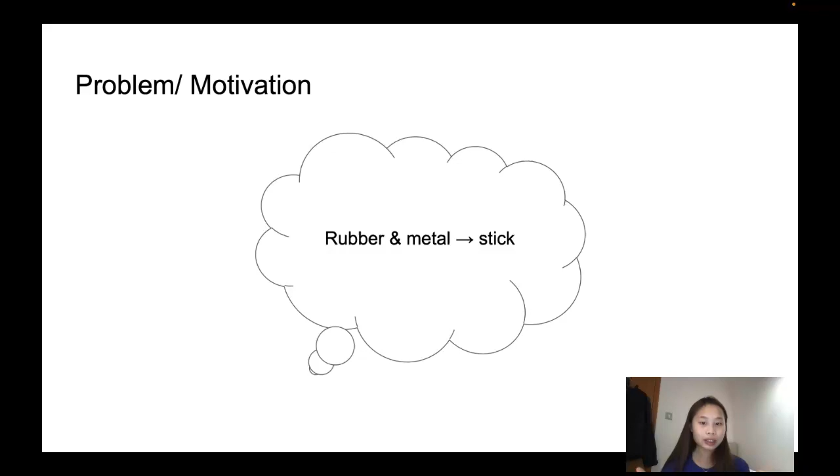And the invention was more of an accidental one because it wasn't initially targeted towards solving a specific problem, but it was invented while Semon was trying to figure out how to make rubber stick to metal. And his approach to this initial goal was trying to heat PVC up and remove the chlorine, but

the PVC just ended up being soft and flexible, and it can be molded into different shapes. So then that was how Semon figured out there's more to investigate. And that's how he invented what we now call plasticized PVC. And the initial process, as we described, was to heat it up and then cool it down, and then the PVC becomes this flexible material.

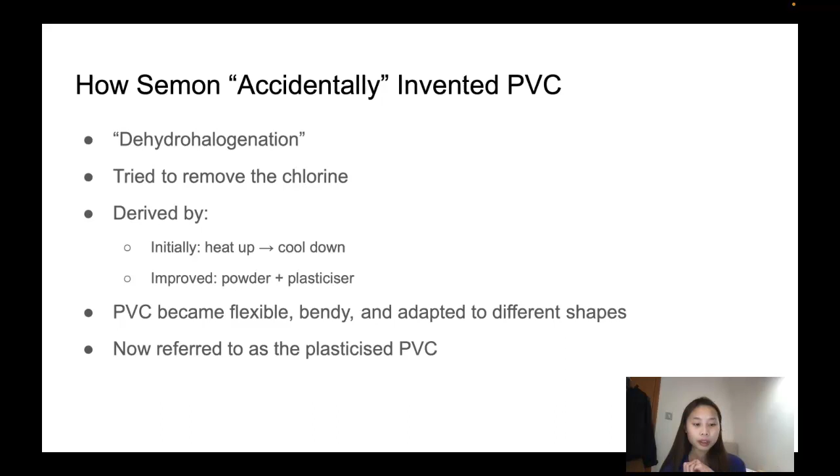But later on, Semon discovered that having the PVC in powder form first and adding something called plasticizer would also yield the same outcome. So that is the improved process that he opted for later on because it's way more efficient. And the challenge that he faced wasn't as much on the technical side, but more to get people to be accepting of the idea, because PVC at the time was a material that people saw as really useless because they couldn't figure out what to use it for.

So then, because people are so used to this idea that there's not much purpose, there's not much that PVC can be used for, it was really hard convincing people of the idea that actually PVC can be so useful.

And that was the same with the investor. When Semon first approached the investor, he was indifferent about it until Semon figured out that putting PVC on fabric would make it waterproof. So then that appealed to the investor, and that was how all of this started and how PVC got on the market and became so popular.

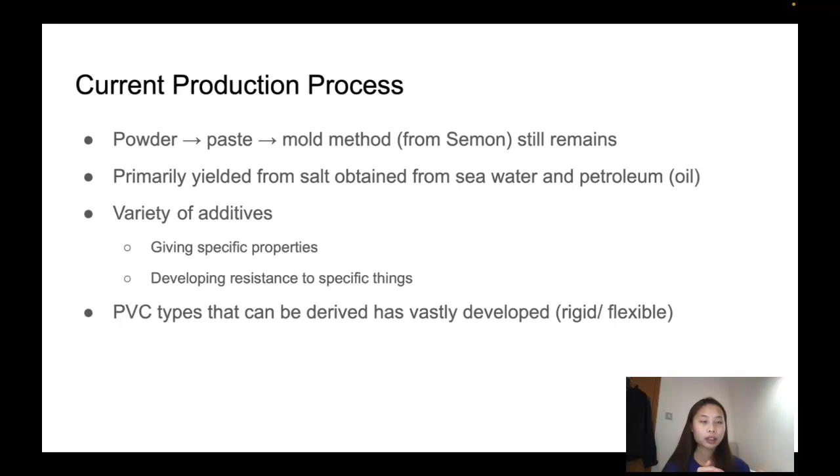So the current production process still uses the same powder method that Semon derived, but more specifically, it is from seawater, salt, and oil. They get combined into a powder and then heated up into a paste and then cool down and get molded into different shapes. And during this process, a lot of different additives are added to give the PVC specific properties.

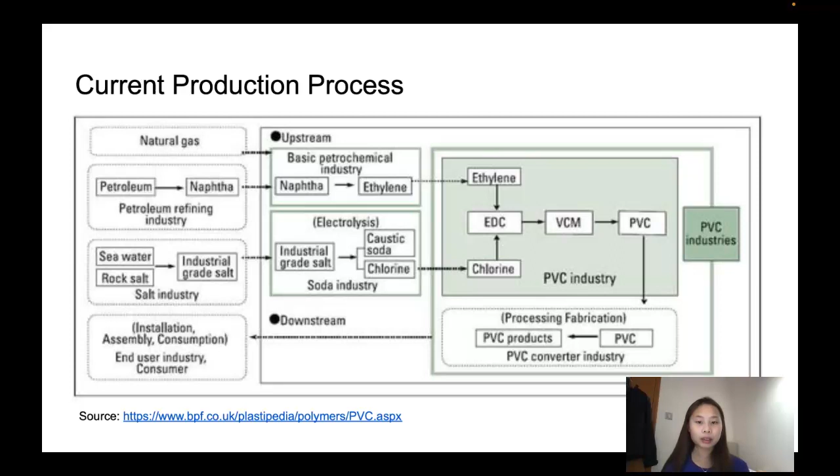And this is a really detailed diagram of how the production process works, but in reference to that, I created a more simplified one that is basically the same but highlights the key steps. So as we can see, from salt and oil, chlorine and ethylene are derived, and they combine, forming vinyl chloride monomer. So basically a monomer is the building block of a polymer.

And so PVC is a polymer, and a polymer is basically built out of many monomers. So there's the vinyl chloride monomer, and then it goes through a process called polymerization, which is basically the monomers coming together, forming this polymer, which is the polyvinyl chloride resin. That is the powder we've been talking about.

And then from there, the powder gets heated up, and while it's heated up, it turns into a thick paste, and then the additives get added to it. And this process is called gelation. So then after gelation, it gets cooled down and molded into different shapes, and then we get the desired PVC compound.

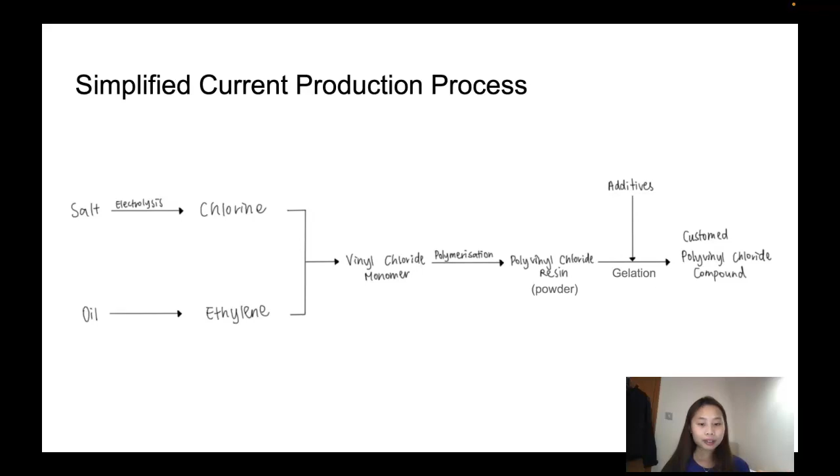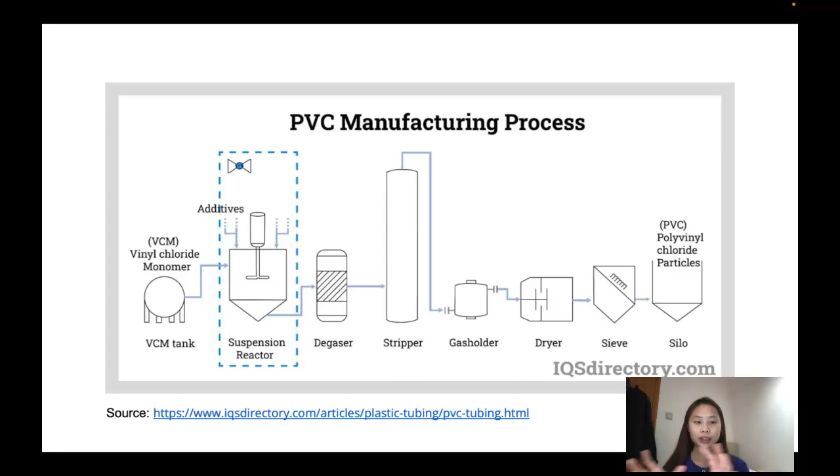And this is an even more detailed process flow diagram of how the monomer goes through all these steps to become the PVC, but this is just for reference. And this is the structure: on the left, it's the structure of the monomer. And then you can see after the polymerization, it's just a lot of these monomers together. And on the right, you can see the structure of the polymer.

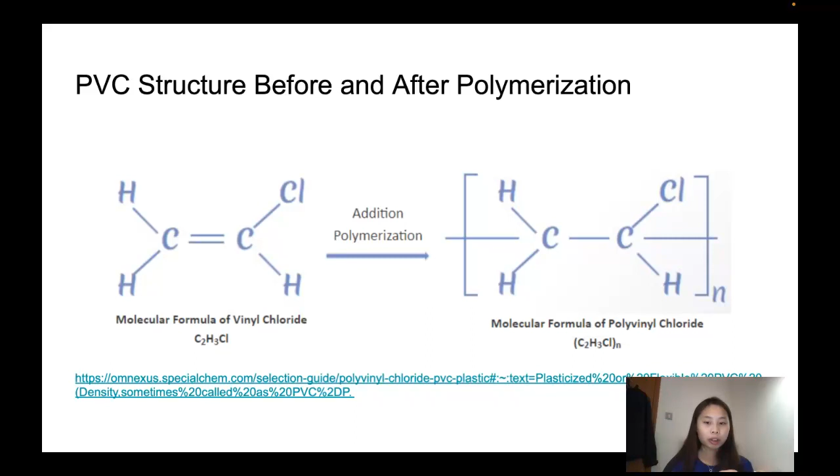So it's basically the same, but the polymer is just a lot of monomers bonded together. And the advantage of PVC is that it's really versatile because different additives can be added to achieve different properties that people desire. So it can be used for many different things. And also the production process is low cost and low energy.

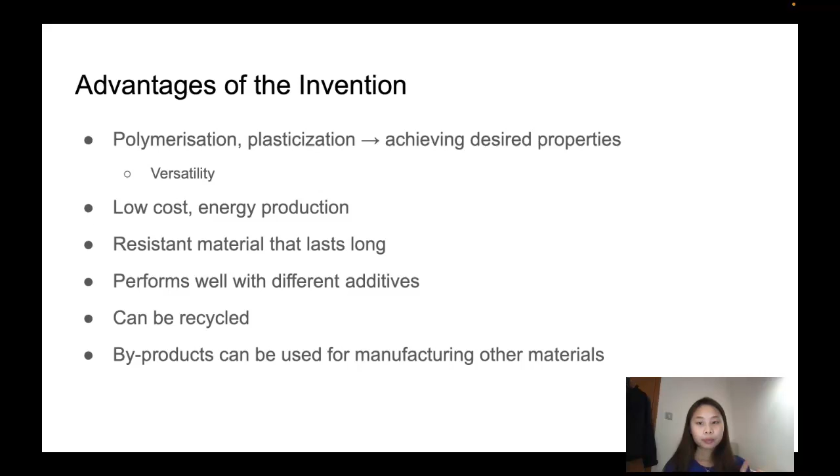And the material is resistant to many different things. And if you add additives that make it resistant to even more things, it becomes even stronger and lasts even longer. And its byproducts can also be used for manufacturing other materials, so that is really helpful.

Some limitations include that, compared to other polymers, PVC is more unstable and it degrades at a lower temperature. And just a fun fact, the degradation reaction is a first order reaction. And also PVC deteriorates over time, and it can even crack when exposed to too much UV, because PVC gets weakened by it. And so it cannot really be used under extreme conditions.

But some helpful solutions include adding stabilizers and specific plasticizers that would not cause plasticizer migration. Plasticizer migration is basically plasticizer migrating out of the material. So when we use specific plasticizers, that would be less likely to happen. And if we coat the PVC, then the plasticizer can't escape.

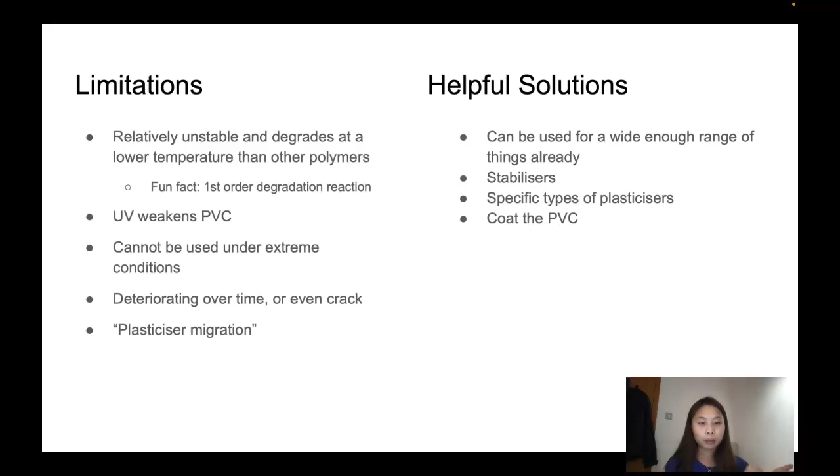And some developments are more focused on the variety of additives that is still growing, because the more additives and the more different types of additives you add, you achieve different properties. So that's how it's developing. And also different colors can be achieved.